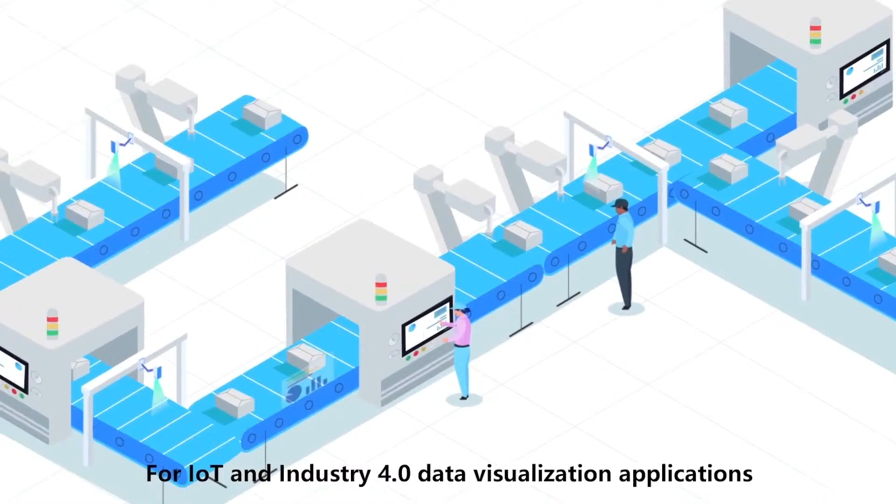For IoT and Industry 4.0 data visualization applications, monitors serve as crucial information display devices in manufacturing sites and factories. But how do you select the right monitor? Many people choose commercial monitors because of their low price. However, commercial monitors are built for office and retail environments. They are not designed to withstand operation in harsh industrial settings that involve constant vibration, temperature and power fluctuations, humidity, dirt, dust, and high usage rates. When monitors fail in industrial environments, the entire process is interrupted while the monitor is replaced or repaired. The resulting system downtime reduces productivity and overall revenue.

Secondly, in terms of cost of ownership over time, the lifespan of industrial monitors is typically 3 times that of commercial monitors. Thus, in the long run, the cost of ownership over time for industrial monitors is actually less, even though the initial purchase cost is higher. Finally, for industrial field applications, monitors must support long-term usage. Unlike commercial monitors that change on a yearly basis, industrial monitors provide model consistency and long-term availability. We hope that by watching this video, you have the knowledge to make a wise choice.

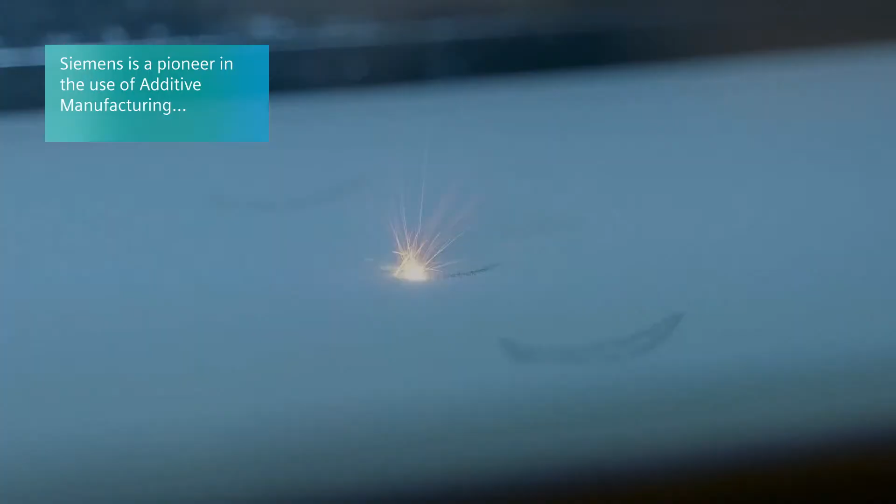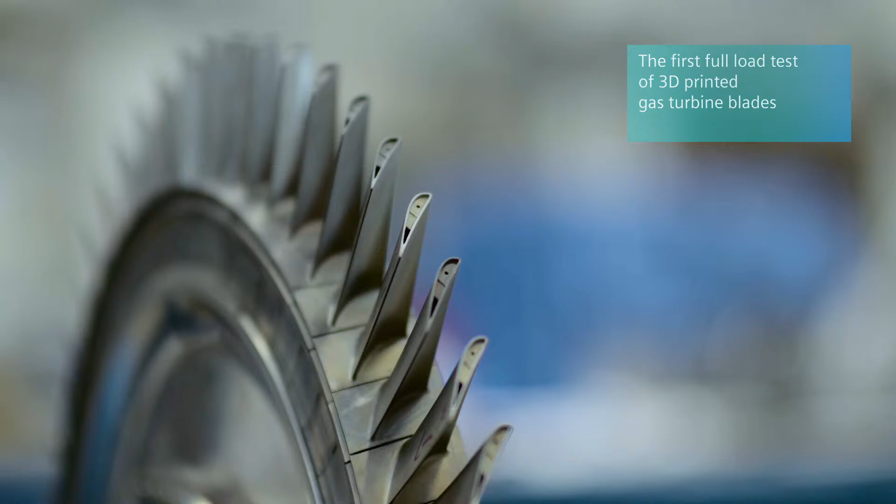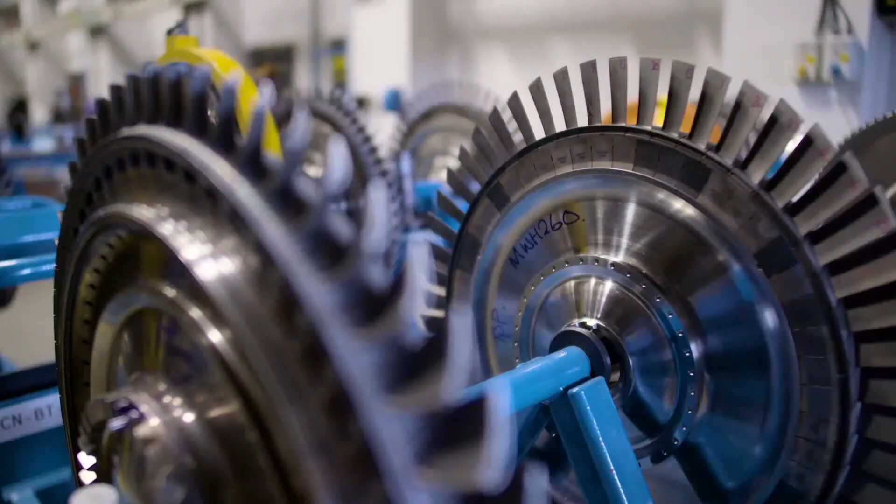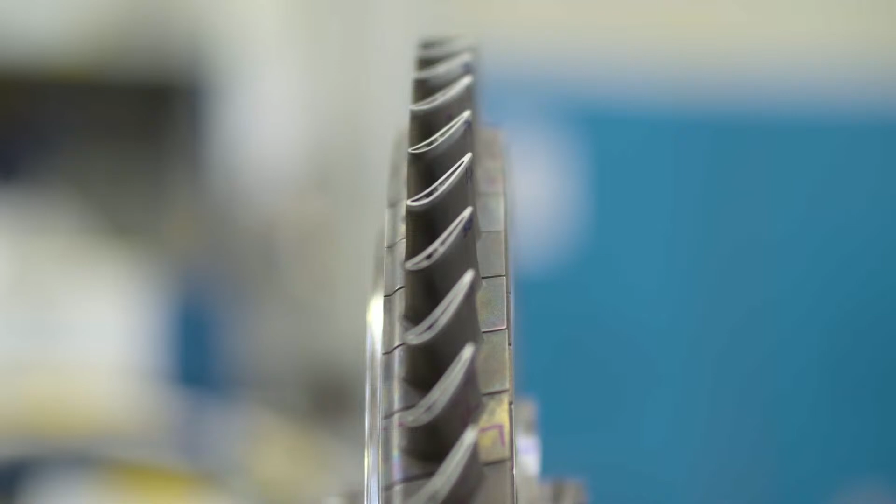The additive manufacturing process enables us to manufacture parts that we cannot manufacture today with normal, traditional manufacturing processes. That enables us to be more ingenious in terms of how we design our turbine blades, how we cool them and how we life them. Turbine blades have always been, I feel, a vision. It's a real target. It's the most challenging area of the turbine. So if you can print a turbine blade, you can pretty much print anything. And we've proven over the last couple of weeks that we have been able to print a turbine blade and test it in an industrial gas turbine engine.

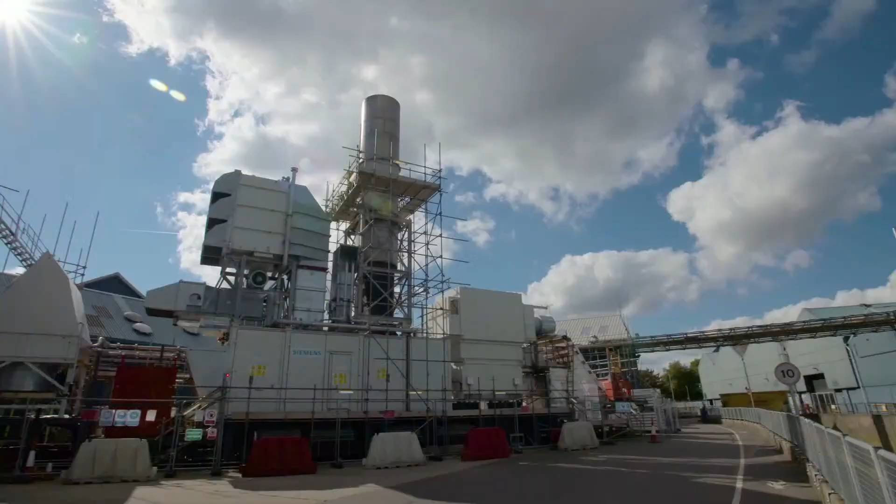In Lincoln, we're testing a 3D printed blade, and we believe this is special because it's the first time anywhere in the world this has been tested at full load conditions in a gas turbine. We test these blades very quickly. In 1 hour, we run the engine at full load. We put a probe in here to measure the material temperatures, which tell us how long these blades will last in a turbine. Now, the turbine blade itself is this particular blade. This is the high pressure turbine blade of a 13 megawatt SGT-400.

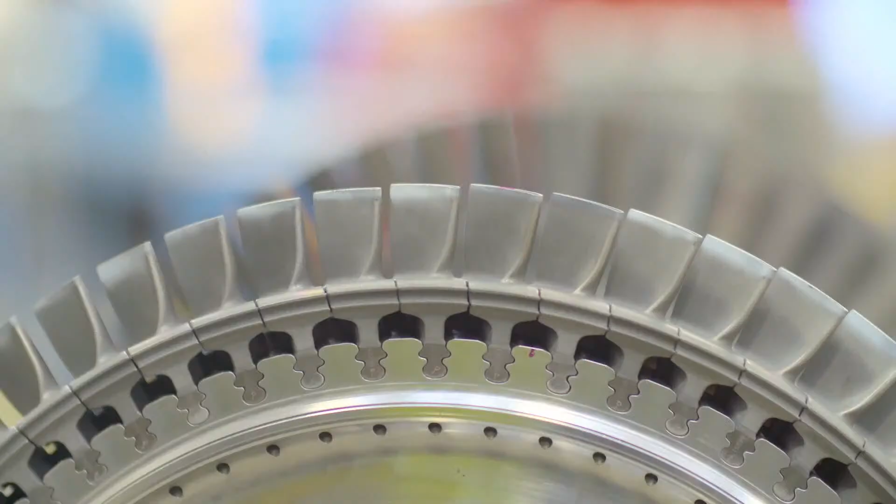Typically, we have to do all of the design, analysis, the aerodynamics, the work in terms of heat transfer on this blade 2 years before we can actually then understand in an engine how it's actually going to perform. What additive manufacture does, and this is the additive manufacture blade that we've actually tested in this engine, this gives us the ability to cut that lead time down from 2 years down to 2 months. It allows us to create new designs, to get more efficient engines, more efficient designs into our turbines, tested and then onto ultimately our customers.

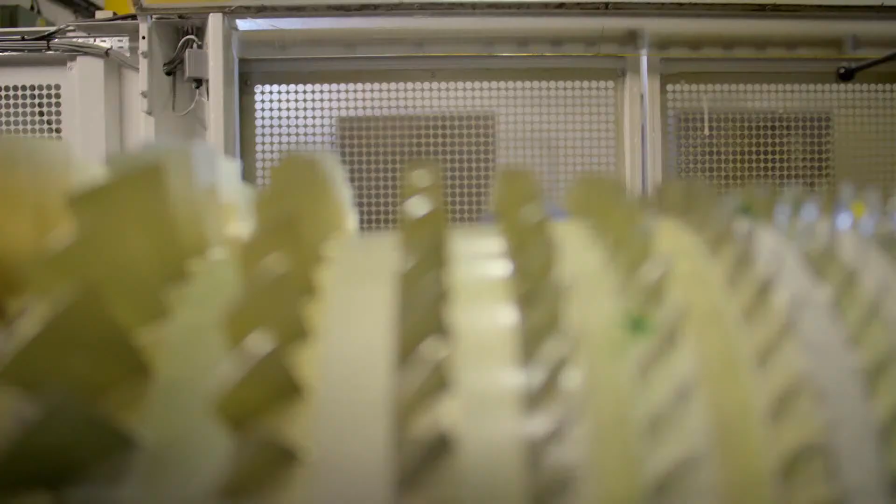We will see quicker development times. You don't need this very expensive tooling in order to make your products. So that makes additive manufacturing perfect for design modifications. You'll get there much quicker. The basic process starts with receiving the model from the customer. We'll then take that model and slice it into very thin layers and export it to the machine. The machine then builds it up in very thin layers, 20 microns, using a laser to melt all of the metal powder together to create the final product.

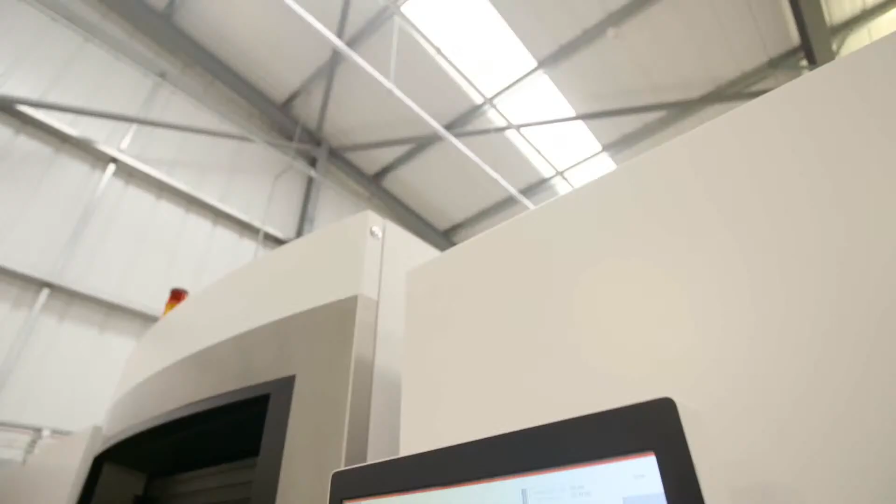Although we've been developing the technology for 10 years, we're still very much at the beginning of the journey of what this technology is capable of. To a certain extent, if you can design it, we can make it. None of this would have happened without the tremendously close collaboration between a large number of Siemens units. It really is ingenuity for life to enable us to satisfy all of our customer needs.

Manufacturers today are seeking efficiencies in production and ways to transform their business through Industry 4.0. Advantech offers intelligent factory solutions designed to help customers unlock the potential of data acquisition, data computing, data visualization, and centralized management in order to create their own smart factories while also improving productivity, reducing loss, and increasing profits. Advantech's solutions include an overall equipment effectiveness solution and a factory energy management solution.

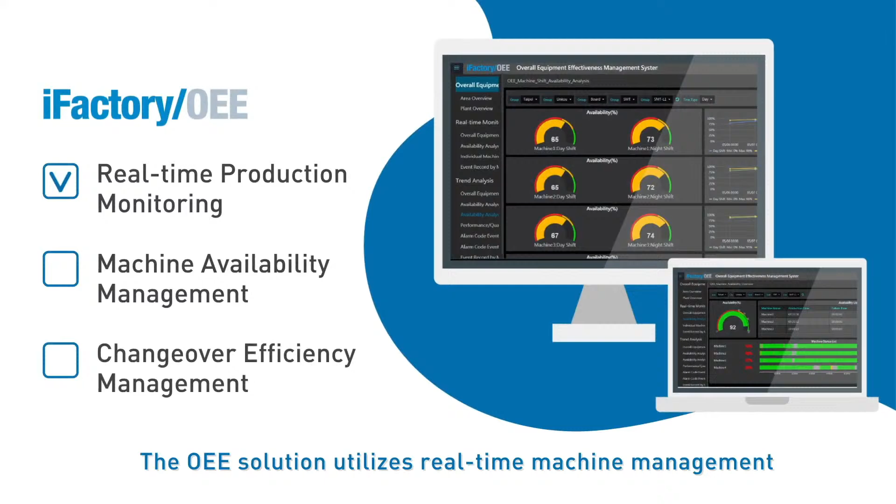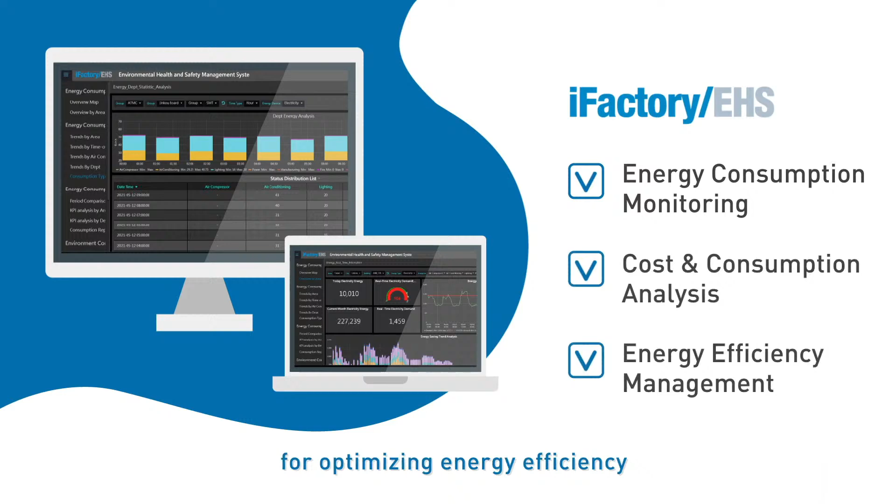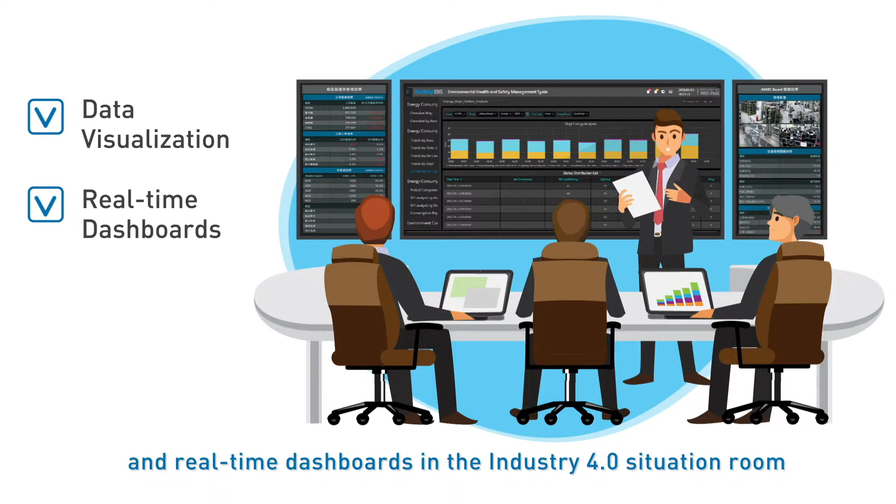The OEE solution utilizes real-time machine management for maximizing operational excellence. The EHS solution enables centralized monitoring and data management for optimizing energy efficiency. For these solutions, customers can use Advantech's on-site servers or cloud platform. The solution features support KPI management, alarm notifications, and remote access to dashboards for convenient management. Moreover, the provision of data visualization and real-time dashboards in the Industry 4.0 Situation Room allows managers to make efficient, data-driven decisions. Join us and unlock the potential of Industry 4.0.

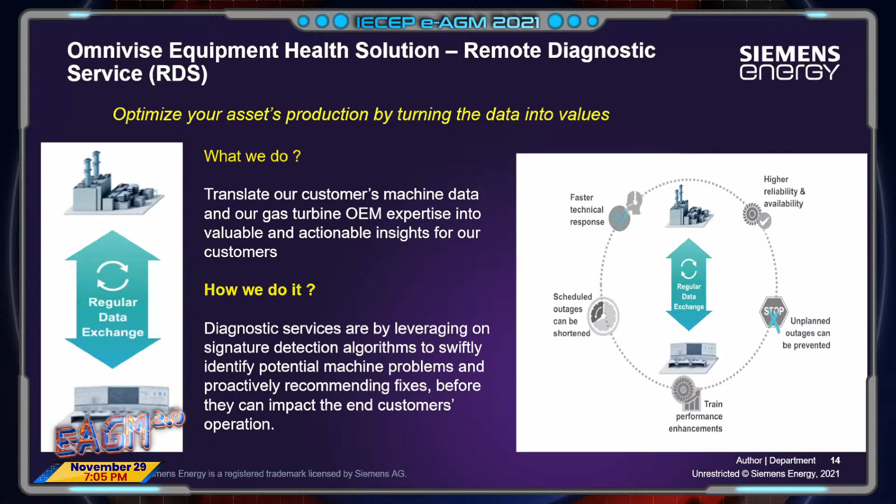Can you move to the next slide?

So the connectivity from the plant to our Siemens data center is through the internet, but we'll have a highly secured mechanism or high security solutions that ensure a secured VPN connection is established between the site and the data center, to maintain the data integrity and address any other cybersecurity concerns raised while integrating the data.

So, Noble, can you go to the next slide?

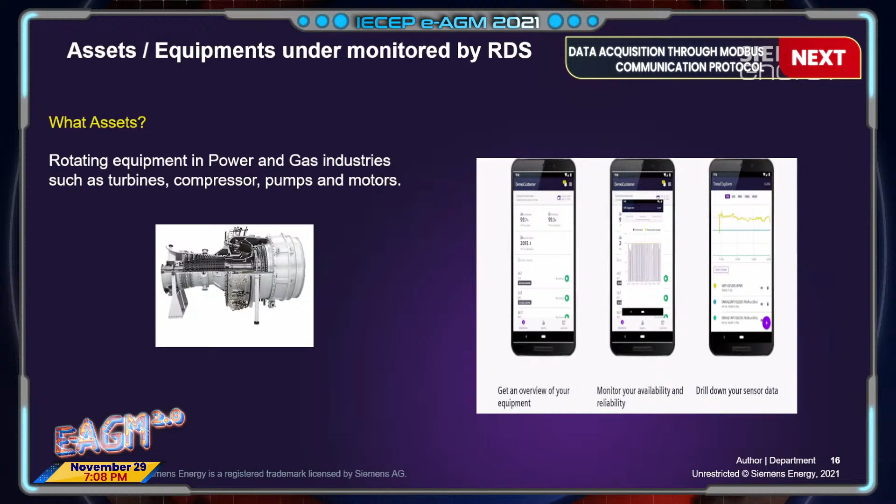Okay, Noble, can you go to the next slide? Okay, before moving to the cybersecurity portion, I'll pause here for any questions. Okay,

let's move to operational technology cybersecurity. Here we are going to discuss what operational technology is, how it differs from IT, what risks are involved in industrial digital transformations, and how Siemens Energy is helping customers reduce the risk in integrating those systems.

So before we go to the OT cybersecurity, I want to give an overview of the difference between the OT and IT cybersecurity. In operation technology, we are talking about the systems which are controlling or monitoring the machines and equipment used in the operational environment. It may be in the manufacturing industry or any other power generation or oil and gas industry. Whereas the IT systems are used for the business purpose in terms of providing the infrastructure to the employees and collecting the data from the OT to do some data processing and analytics.

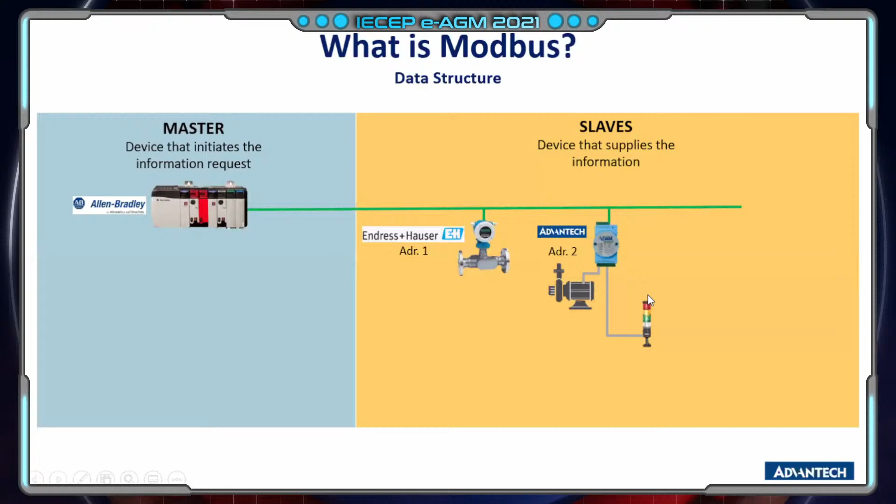So for this example, we have the ultrasonic flow meter at address number 1. This is a multi-drop connection. Multi-drop meaning the main line is your bus, and for the next one you have another drop, which is for our Advantech relay module controlling the motor and the tower light status, at address number 2. So multi-drop, if you look at it, it's like a parallel connection.

If you're going to expand this wiring, it should be in daisy chain or multi-drop connection. Later I will explain the do's and don'ts in network topology of Modbus. I'll look forward to that. So multi-drop, and this one is Advantech.

So as you can see, we already have 3 products communicating using Modbus. The next one is a Schneider Electric energy meter at address number 3. And as mentioned from its definition, you can address these devices from 1 to 247 devices. Later I will also give you the limitation on how many devices you can connect on a single branch.

But for now, let's just focus on the master and slave transaction. With this, I prepared a simple logic, if you can call it, so that we can see the flow of data.

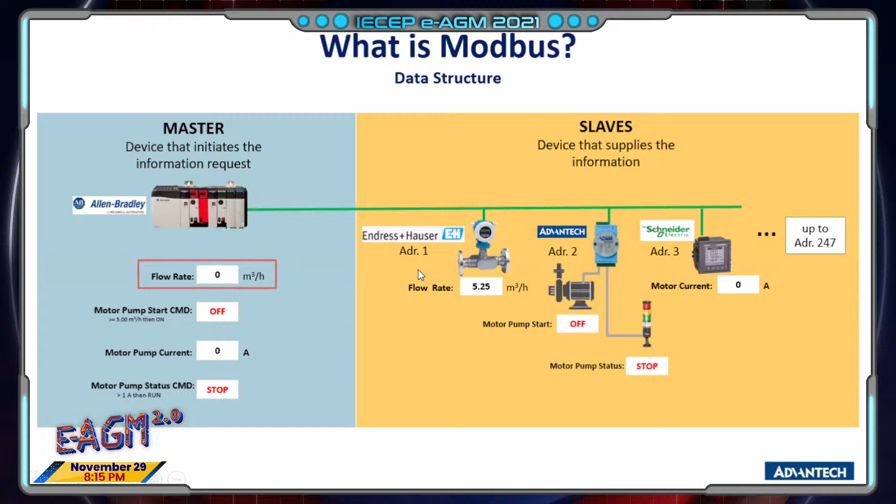So for example, as you can see here, the master would like to know the flow rate. Right now the reading is 0, but on the ultrasonic flow meter we are already getting 5.25 cubic meters per hour. So what the master will do is initiate the read request. Why read? Because the master would like to read the 5.25 from the ultrasonic flow meter. So this bit of data represents the address and the request. Later we'll try to elaborate on that bit of data.

But before that, FAQ number 1: how fast is Modbus protocol? In serial mode, the rate at which these bits of data are transmitted is determined by the baud rate setting. By default it's usually 9,600, there's also 19,200, and up to 38,400 bits per second. Compared to TCP/IP mode, the speed is determined by which Ethernet speed connection is being used.

Whether your network is connected at 10 Mbps, 100 Mbps, or even 1 Gbps. So from this you can already figure out, hey, TCP/IP mode is much better. That's one of the advantages, it's much faster compared to the serial mode.

Okay, going back. So the master will initiate the read request and send it to the flow meter. The flow meter will accept the request and send a valid response containing the value of 5.25. And there we go, we're going to have a flow rate of 5.25 read from the flow meter.

The logic here is: the motor pump start command will turn on if the flow rate is greater than or equal to 5. So it's now on. The master will send this time, this is a write request.

A write request, and this will send it to the Advantech at address number 2 to control the motor. Same thing, the Advantech IO module accepts the request and turns on its output, as you can see it's now on.

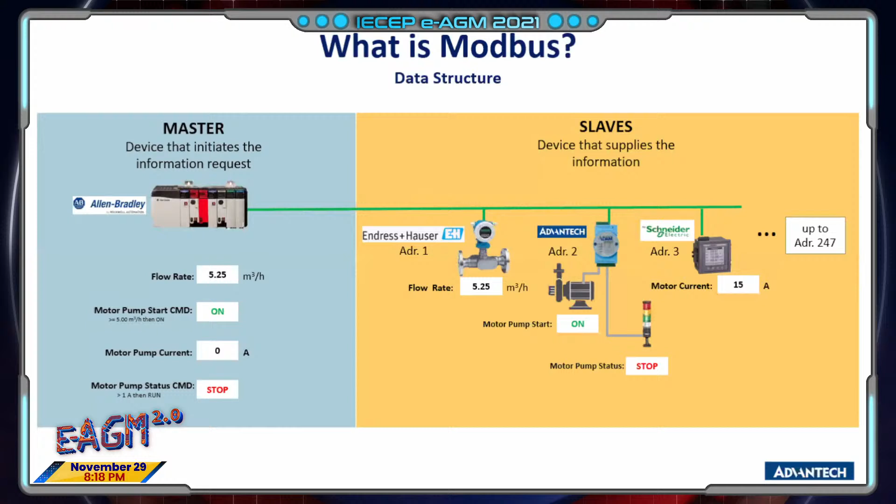Right now it's still showing 0, but the actual motor is actually running right now, so right now it's 15 amps. So again, okay, we're going to initiate a read request.

Okay, the slave device accepts that and sends the response.

One more example, we have the motor pump status, or our tower light, some of you may call it the andon lights. So it still shows stop even though our pump and motor current indicates that it's already running. So in the logic here, if the current is more than 1 ampere, then initiate a command to turn on the green or running status.

So again, a write request, that goes to the Advantech IO module, and then it sends a valid response.

Question: so what happens if it is an invalid response? It only happens if the request sent by the master is wrong, meaning for example it's asking for specific data that is not available on the slave devices. So that will be a wrong response.

But usually this kind of issue you will only encounter during the initial stage of the automation project, during testing and commissioning. Of course, you're not going to proceed with the project knowing that you're not getting the actual data, right? That's why there is a testing and commissioning stage in every automation project. So that's my example for the motor pump status command. Hopefully you can have at least an overview of the operation, how master and slave works, or the transaction between them.

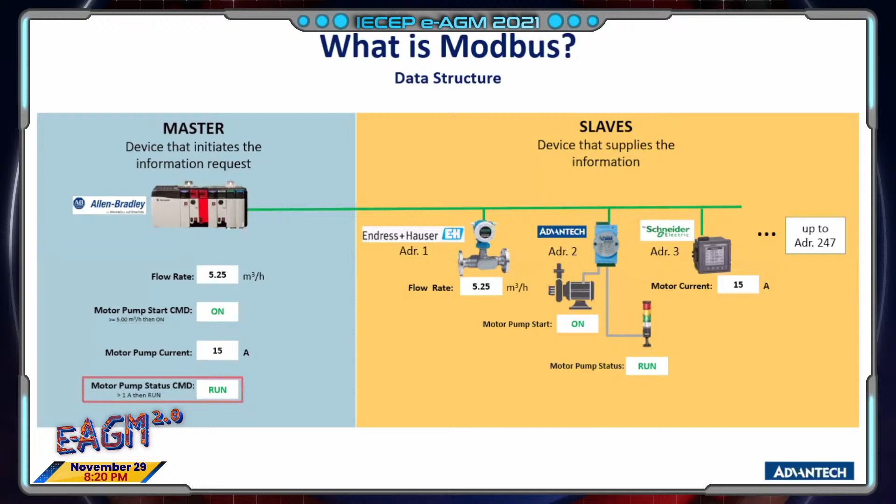Next one, we have, okay, I told you a while ago that we will try to dig deep a little bit. This is we will try to dig deep on the read requests, or the data structure itself, particularly right now we are doing the requests.

Let me tell you now that this is not important, but I would like to share it with you so at least you can have an overview of the raw data structure. Again, raw data structure, meaning if you're already familiar with Modbus, you're not going to encounter this one anymore. So more on that.

Quick one: this data structure request, as you can see here, we have a read request in terms of binary, zeros and ones, 110, 01. These are binary. So if we convert it into a hex format, it's easier to understand hex compared to ones and zeros, right? So what you will see if you convert it into a hexadecimal format, the first byte on the request data will indicate the device address.

01 is in, everything is in hex. The good thing is our ultrasonic flow meter address is 1, and the equivalent hexadecimal value of 1 is also 1, so that's why 01 is equal to 1 in decimal value. So the first byte is the device address. It's intended, meaning this request is only for address number 1, to identify the destination of this request. That's the first thing on the data structure. The next byte...

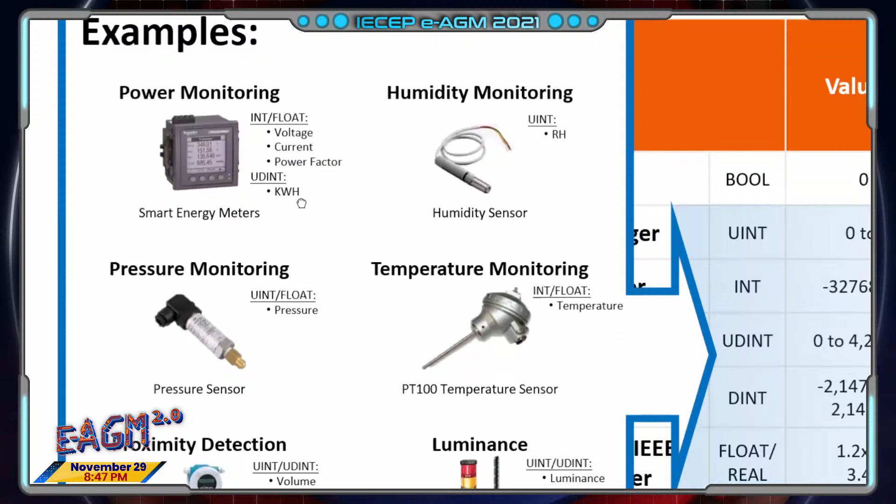Humidity monitoring is in terms of percentage, so that means there isn't any negative values, that's why I used UINT, or unsigned integer. For pressure monitoring, we have unsigned integer or float, okay, for pressure monitoring, unsigned integer, it depends on the manufacturer.

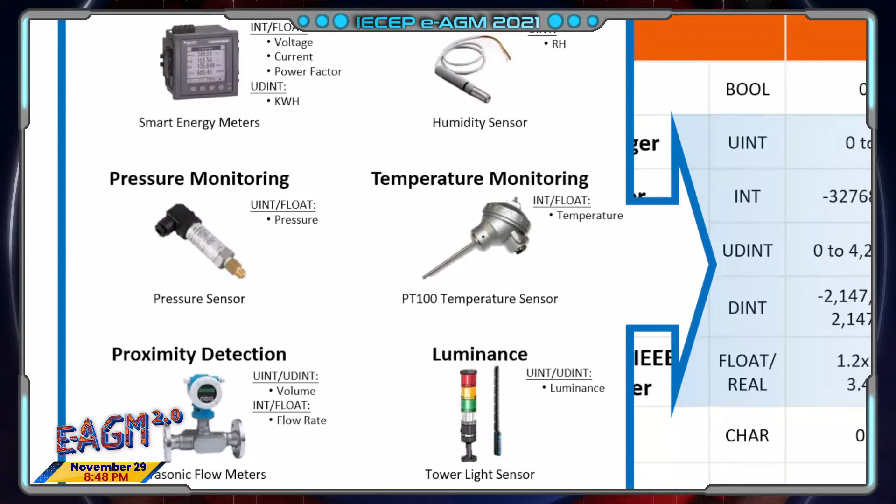Sometimes they set it as integer, or as signed integer or unsigned integer. But if you can imagine, if you're not supposed to get a negative pressure, not unless you're getting backward pressures or something, it's supposed to measure that. But for now, we can assume it's unsigned integer. Temperature monitoring uses integer, of course, because negative positive temperature is possible, floating as well, for greater precision.

For proximity detection - oh sorry, this is not proximity detection, this is supposed to be flow rate detection. So for the volume, the accumulated volume, meaning we can set integer for the flow rate, right? Integer or float for the flow rate, but the accumulated volume, which is in cubic meters or liters, is a positive value, positive accumulating value, so it's not supposed to be a negative value.

And last on my example is luminance, unsigned integer and unsigned double integer, depending on the manufacturer's requirement. So one of my examples here is our tower light sensor. This is a non-invasive tower light sensor that you can just zip tie on the tower light, and it can detect whether your lamp is off, on, slow blinking, or fast blinking. And you can also detect the luminance level, the intensity, so that you can set the set point or the bandwidth for that one.

Let me correct this one.

Okay, let's go with the FAQ number 2.

Let's proceed. Sorry. Okay, FAQ number 2. Sir, integers are whole numbers, no fractional component. Then how do we get analog values with decimal places? In our example, we actually have 2 methods, okay? But there is a disclaimer. I'll give you the disclaimer later. I would just like to give you these 2 methods, okay?

First method is scaling factor and offset. If the scaling factor and offset is given in the manual, for example, in our example a while ago, we are reading 5.25 cubic meters per hour. If the data is indicated as unsigned integer, then we're going to read 525. Remember that? 525. So it's not 5.25. So that means we need to check the manual. What is the scaling factor? Then you should be able to get a scaling factor of 0.01, and probably you're not going to use offset, okay? So that's why on this one, it's just 0.

So for the formula, engineering value is raw value times scaling factor plus offset. So 525 times 0.01 plus 0 is now equal to the actual reading, which is 5.25. Raw value to engineering value. So this is the one that I'm talking about, converting the raw into engineering values. Okay, this is one method. Method number two

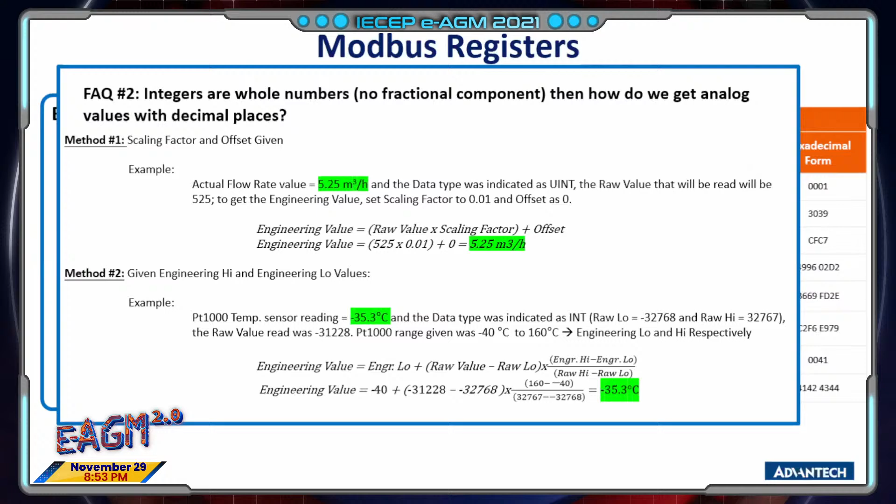So for the disclaimer, this method is applicable for 16-bit registers, low precision. Remember, the range is around negative 32,000 to 32,000. And these are integers, which normally don't have any fractional data. So manufacturers will just use the floating point value instead of those 16-bit data. It's much easier to work with. You'll just have to use this 32-bit data, and you will get the real value without those computations. You will actually get the actual value itself.

No more calculations, no more determining the engineering low and engineering high, remembering the range of integer and unsigned integer. So no more of that. Okay, and then let's go with the last one. Examples for character and string. We have barcode entries, such as QR barcode.

For HMIs or human machine interfaces, we can put alarm codes, or for example, the operator can input some short text or messages to send via the automation protocol, sometimes Modbus. Another use of ASCII codes is if you are monitoring the firmware version of your device. For example, this particular temperature controller has a firmware version that is a combination of alphanumeric characters. Then you can use this character or string data type.

Okay, FAQ number 3, just a quick one. This is applicable not only for character and string, but also for number or analog data. The manner in which data is stored in memory is defined by the setting, big endian or little endian. For example, ABCD is stored as 41, 42, 43, and 44. 41 is A, and D is 44. But if it is indicated as little endian, that means you will read first the last or lowest value, which is D.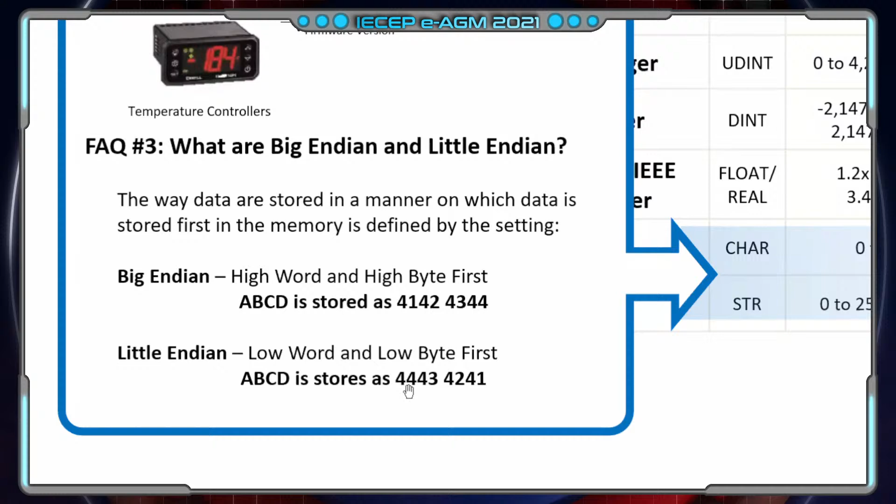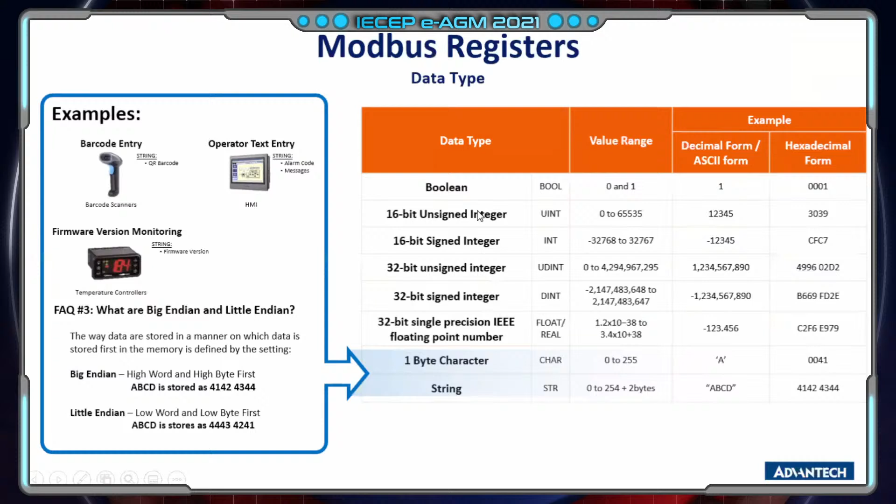this one. So Modbus registers, also known as Modbus addresses, refer to the 4 data tables in which the data are stored on the slave device. Two tables for storing on-off discrete values and 2 for storing analog values. Each table can store up to 9,999 values. As I mentioned, you don't have to remember or interpret those bits of zeros and ones. You can just refer to this table.

This table describes each memory address on the slave devices. There are 2 for the digital signals, input and coil. For the analog, we have input register and holding register. Input status and coil status, as I mentioned, are digital input and digital output respectively. They only deal with digital signals. The only difference, other than the register number, is that input status only has read capability, while coil status has both read and write capability.

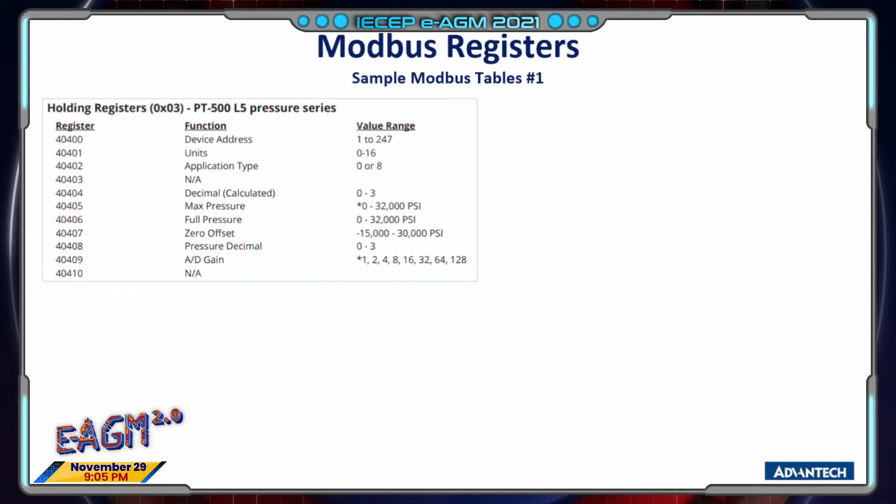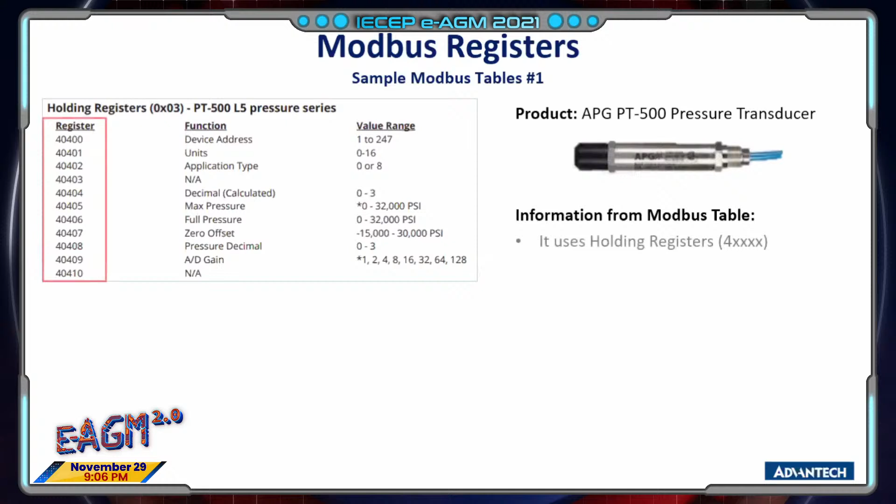Now let's go to application. Let's not go into the theoretical. What I have here are some sample Modbus tables from different manufacturers. This is a pressure transducer from manufacturer APG, a PT500, that's the part number. According to their Modbus table, this is the information we can get. It uses holding registers. Why? 40,000.

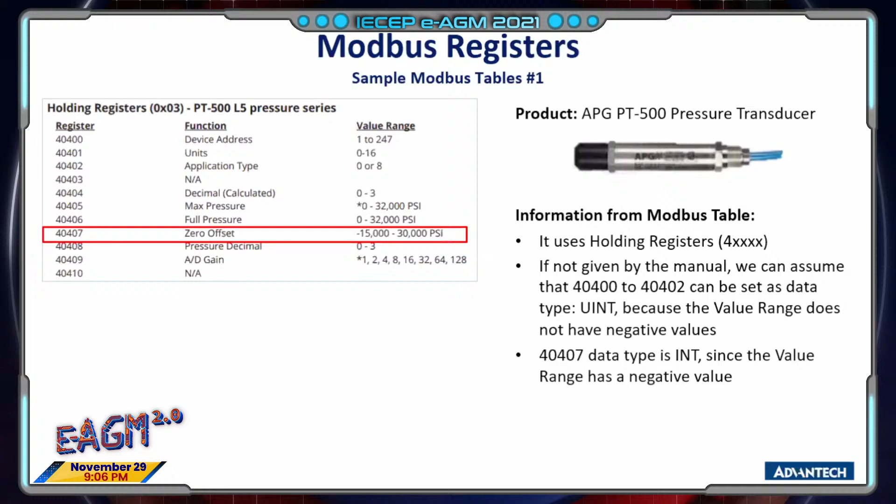Highlighting 400 to 402: if not given by the manual, we can assume that 400 to 402 can be set as type unsigned integer, because according to the value range, there is no negative component. So it's safe. Next finding: however, 40,407's value range is negative 15,000 to 30,000. So that's why you're going to set the data type as integer to accommodate the negative values.

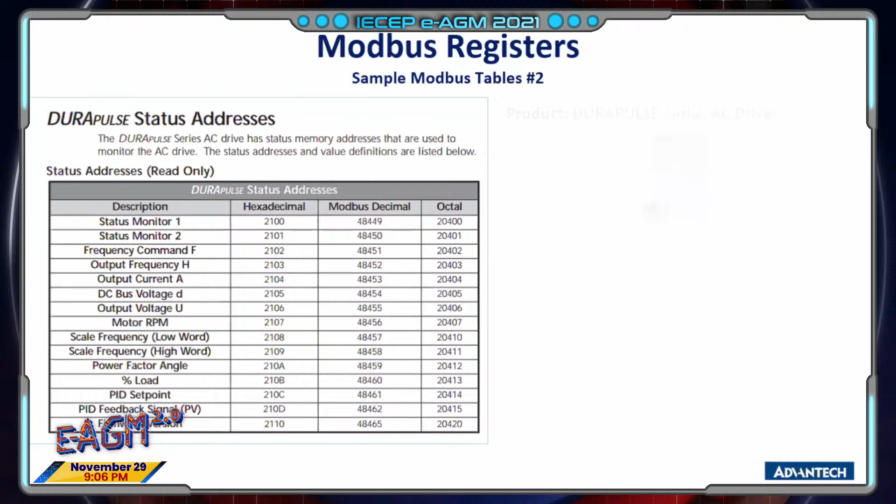Let's move on to sample Modbus table number 2. This is a DuraPulse series AC drive, a VFD. What data can we extract from this based on the topics we have already covered? Hexadecimal addressing is the equivalent Modbus decimal of data address. For the first bullet, as you can see, 2100 hexadecimal. If you convert that to decimal, it's 8448.

Remember, holding register is 40,000. So you have to add the offset, which is 40,001. That's why you're going to get 48,449. So 2100 Modbus address is equal to 48,449. Don't be confused. But if you're ever confused, email me this table and I will help you interpret the Modbus table.

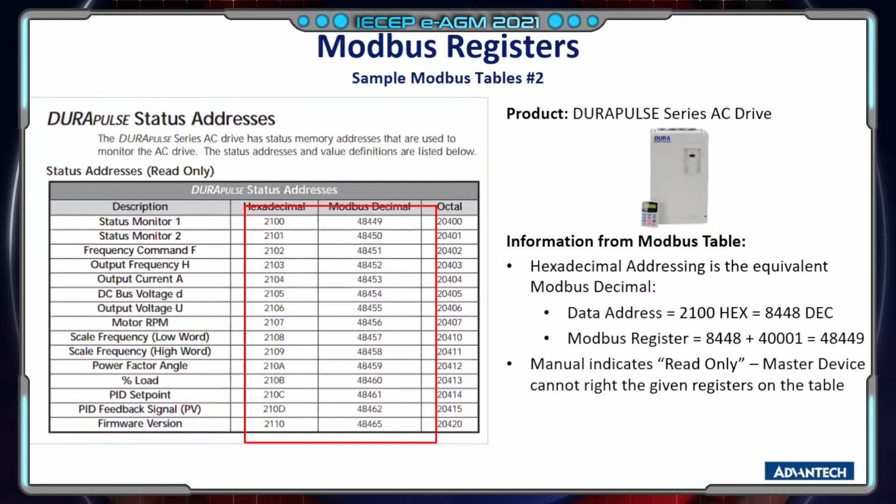And there's a mistake on the slide, but the manual indicates read only. So that means we can only read the following data: the firmware version, percent load. We cannot write anything to this. Okay, simple.

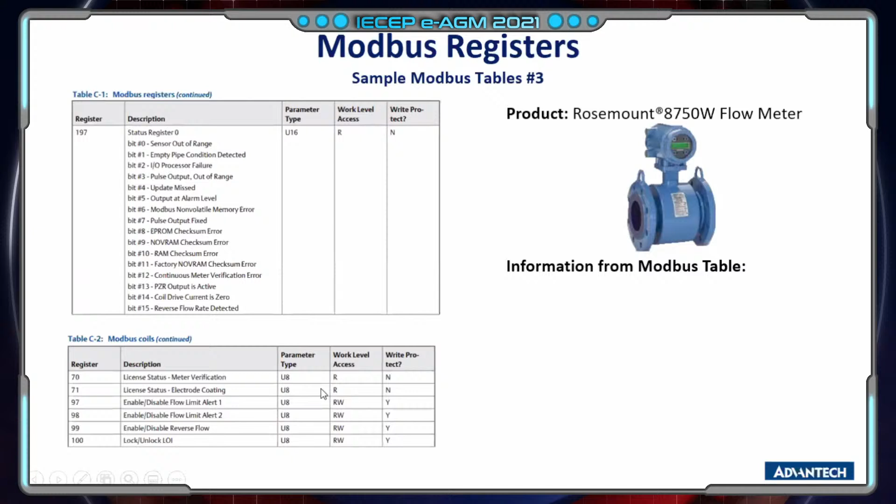Okay, this is for the holding register, and as you can see here on table C-2, it is for Modbus coils. So remember, Modbus coils are from 1 to 9,999, and it's digital, read and write. So that's why you can see here, read and write, and it's coils. Okay, what data can we get?

If we access 40,197.x2, the bit number 2, it will give us the status of the processor failure, on and off status. Okay, you're only going to get 0 and 1 when you access a bit.

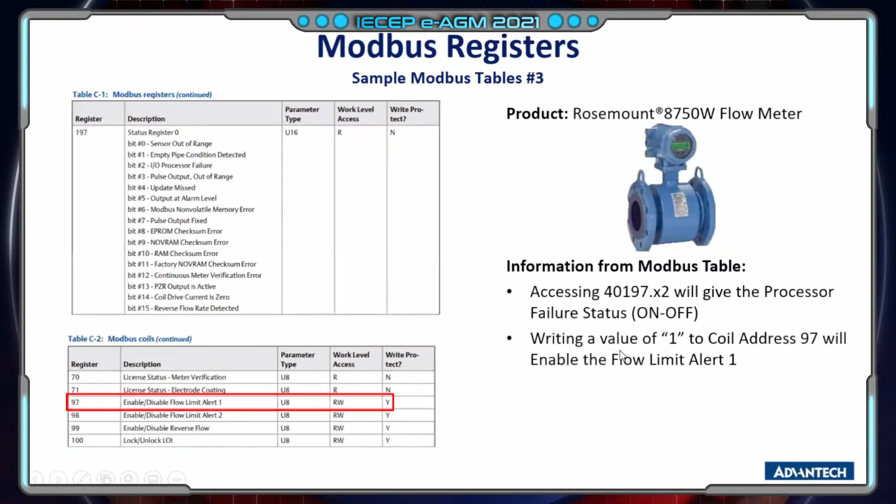Next, writing a value of 1 to coil address 97. So this is already 97. You're not going to add any offset because again, coil status starts from 1 to 9,999. So coil address 97 as it is will enable the flow limit alert 1. So this is a read and write capability. That's why you can write values onto it.

Okay, to answer as promised, I forgot his name but if you're listening, this is the actual software tool that I'm using in troubleshooting and further understanding Modbus protocol. So FAQ number 5, what Modbus software tools can you recommend? I have these two softwares right here.

ModScan is a Modbus software tool developed by Wintech that operates as a Modbus master. The yellow one is the Modbus master. It can support both Modbus TCP and RTU. On the other hand, ModSim, from the word simulator itself, is simulating the data. So it acts as the Modbus slave. Both softwares are developed by Wintech.

You can actually download a free trial version of the software at their website, www.win-tech.com. Okay, so how do I use this software? You are having issues with the retrofit of a replaced PLC with Modbus connectivity, right? It depends on the requirement. Maybe you're hoping that I can get more information.

So for example, let's say you would like to troubleshoot. Maybe the problem is the slave device. Then I'm going to install ModScan on my laptop and connect the laptop to the slave device. If your device is Modbus TCP, then the connection means is what? Ethernet. But if the slave device only offers Modbus RTU, then it can either be 2-wire for RS485 or point-to-point, which is usually RS232.

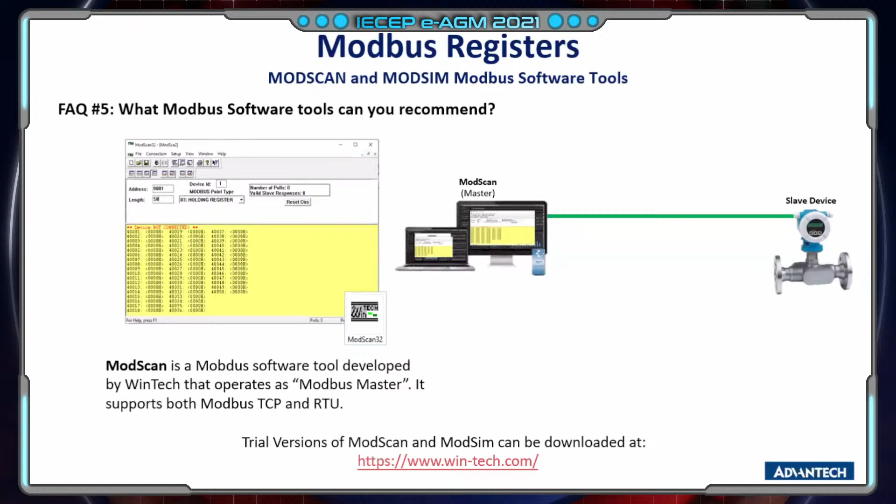Next 2 slides are network topology, the last part. Okay, so that's how I troubleshoot. With ModScan acting as the Modbus master, I can send the request to read and write from the slave device. If I'm getting data, or I was able to establish connectivity, then I can say there's no issue with the slave device. This is my go-to software, ModScan, very useful.

Next, ModSim. I use this if I don't have any slave device and I have a PLC, and what I want to do is send simulated data to the PLC just to check if the PLC is receiving it. Then I'm going to use ModSim. Again, ModSim acts as a slave. So that's how I use these 2 softwares.

For those of you who don't have either a PLC or an instrument device, you can connect these 2 softwares together, within the same PC or even a remote PC. You can connect the ModScan master and ModSim slave with each other, and they can actually read each other. In the background, I'm actually doing that.

So as you can see here, again, yellow is the master, gray is the slave. For example, the slave has a reading of 1, 2, 3, 4, 5, and it's reflected on the master. Let me just demonstrate real quick the read only capability. Remember, for digital signals that are read only, which is input status, the offset is 10,000. 10,000 input status, read only.

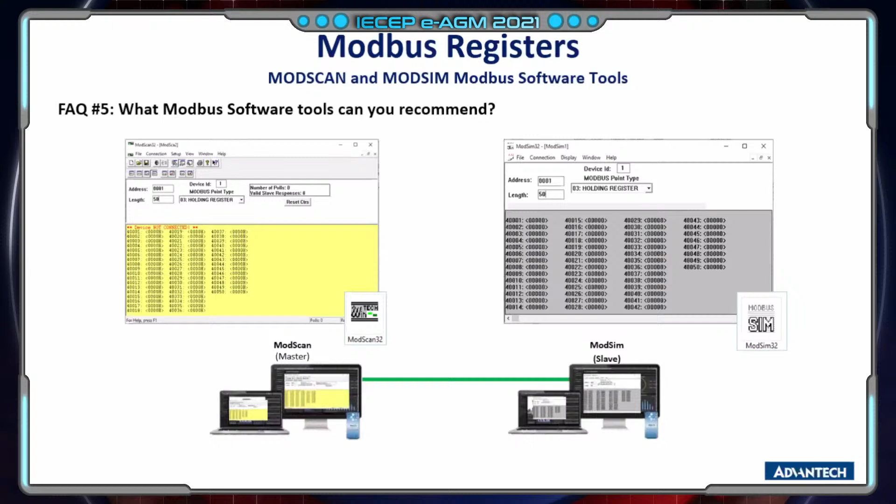So this is a very useful tool for those of you who would like to explore more on the automation side of Modbus protocol. Self-taught. You can teach yourself the Modbus protocol just by using this software. And last 2 important slides, to be honest.

Remember, I always mention Modbus RTU, Modbus TCP, but what are their topology or their wiring or their connectivity? Modbus RTU, short for remote terminal unit, is a serial communication protocol where serial bits are sent through serial lines of either RS232 or RS485. I mentioned on FAQ number 1, the speed is determined by the baud rate. Addressing is done by unique ID from 1 to 247. Comparing the 2 communication means of RS232 and 485, you will already see the differences and the advantages and disadvantages between the 2.

RS-232 maximum distance is 15 meters. And since RS-232 is dependent on 3 wires, TX, RX, and relative to common or the ground, pretty much a full duplex communication, your connection between the master and slave will be quite limited. It will be point to point, one master, one slave.

But to avoid signal reflections, use a 120 ohm terminator resistor at the end of each main cable. So as you can see here, from the master itself, I have a 120 ohm resistor before I connect slave 1. And at the end, just make sure that this is the end, meaning there's no slave 3 after this line, another 120 ohm resistor.

Will it work if I don't use a 120 ohm resistor? Yes. If your line is less than 50 meters, or for testing purposes, you don't need a 120 ohm resistor, especially if the distance is not that great and the transmission load is not that high.

And lastly is Modbus TCP. So with all those serial bits that we have encountered, the data structure, Modbus TCP encapsulates this serial code or data structure into TCP/IP packets.

Instead of slave address of 1 to 247, each device has its own IP address communicating to port 502. 502 is a port specifically assigned for the Modbus TCP protocol, so try to remember this. You will always encounter this 502, it's a dedicated port for Modbus TCP, along with a unique IP address.

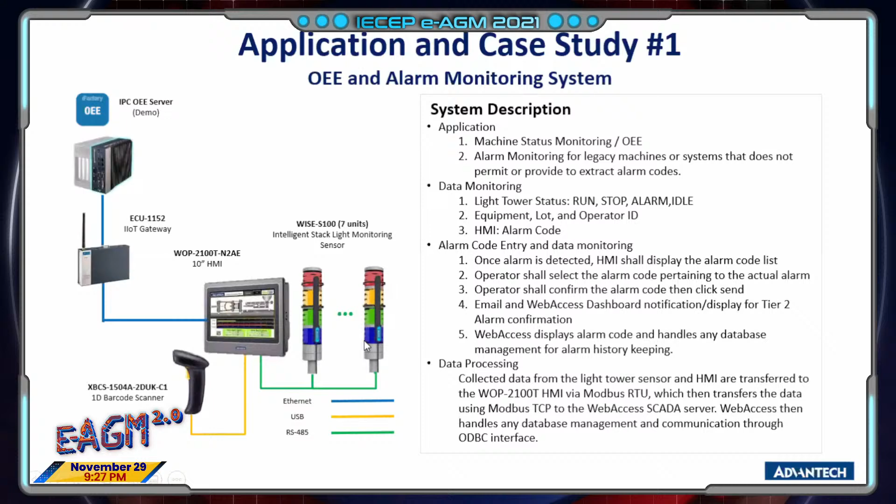So that's actually how this project goes. We are pretty much using two technologies of Modbus — we have Ethernet for the blue one, Modbus TCP, and daisy chain RS485 for the WISE S100. Two technologies on one project.

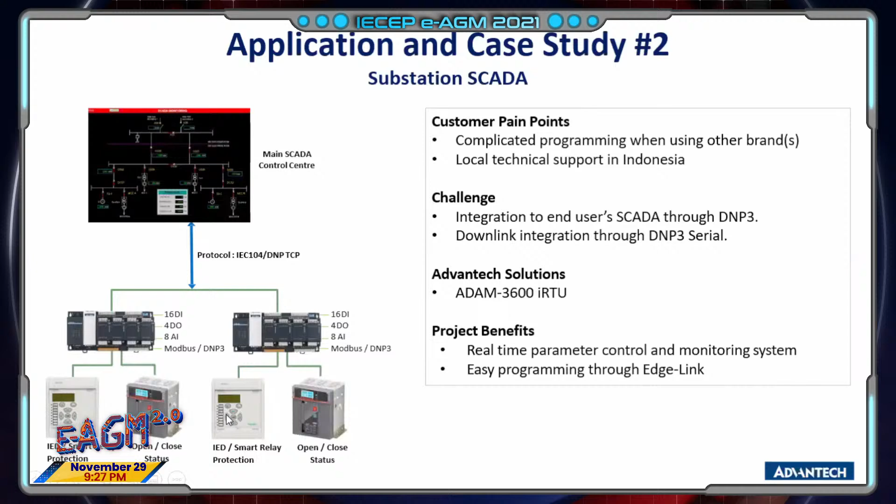In one of our substation SCADA applications in Indonesia, we are using this for power and energy applications using our RTUs. We are working with DNP3, one of the standard communication protocols in power and energy, but Modbus is still being used on the field level. That's why I included this case study in this presentation. On the downlink, I'm not sure if it's communicating with the smart relay protection or the switch gears, but I believe it's the smart relay protection using Modbus RTU.

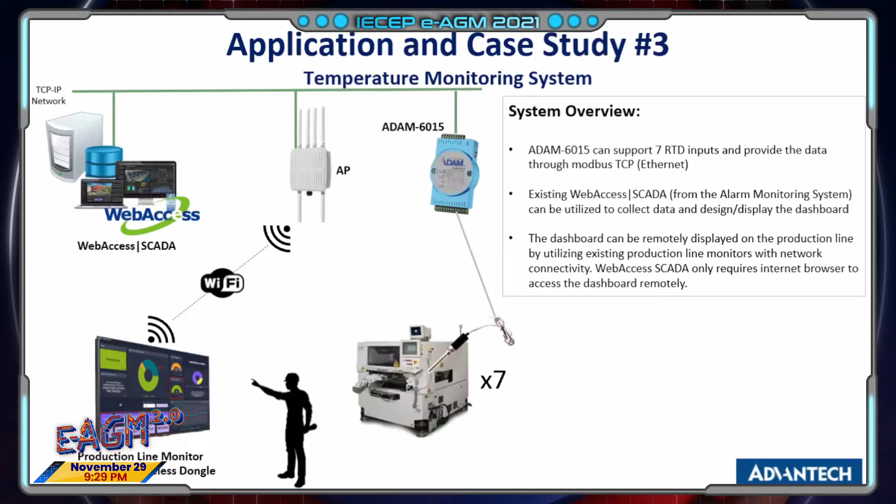Once the server is able to process the data, it can also display the data on a wireless TV. Let's say on the production line, imagine your TV, just plug in a USB dongle key, open Google Chrome, and plug in the IP address of the SCADA. Then you will have remote connection, wireless SCADA. You don't have to call the operator in the control room to ask about the temperature of a machine, because from your phone or your TV on the production line, wirelessly, without any additional hardware like PLCs, you can already have the dashboard capability.